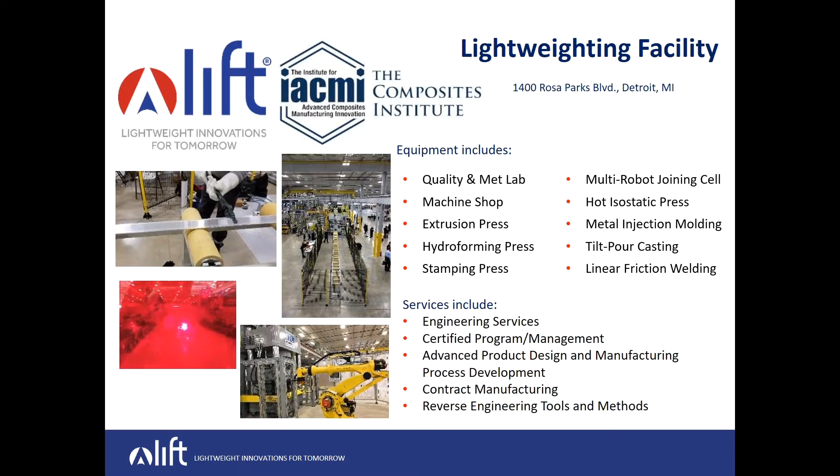As I mentioned, the Lift Off webinar series is brought to you by LIFT and the Center. So I want to give the Center a chance to talk about their services and the support they provide manufacturers across the state of Michigan. So I believe we have Elliot Forsyth on from the Center to do just that. So Elliot, I will hand it off to you.

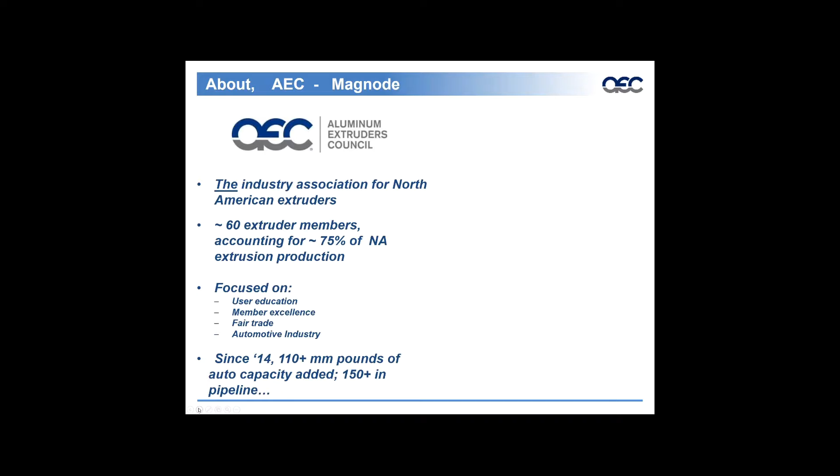The AEC is the Aluminum Extruders Council, the industry association for North American extruders. We represent approximately 60 extruder members, accounting for approximately 75% of all North American extrusion production. And our teams are focused on user education, member excellence, fair trade, and, as we are here today, the automotive industry. Since 2014, approximately 110 million pounds of auto capacity has been added, and approximately 150 plus in the pipeline to support the automotive industry.

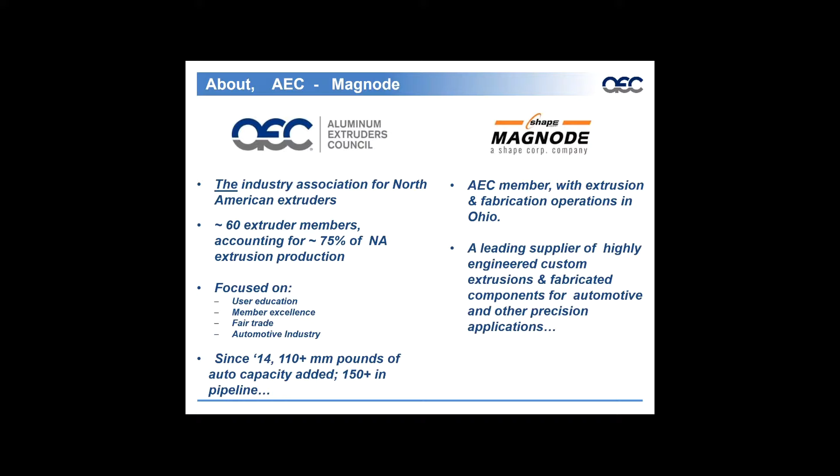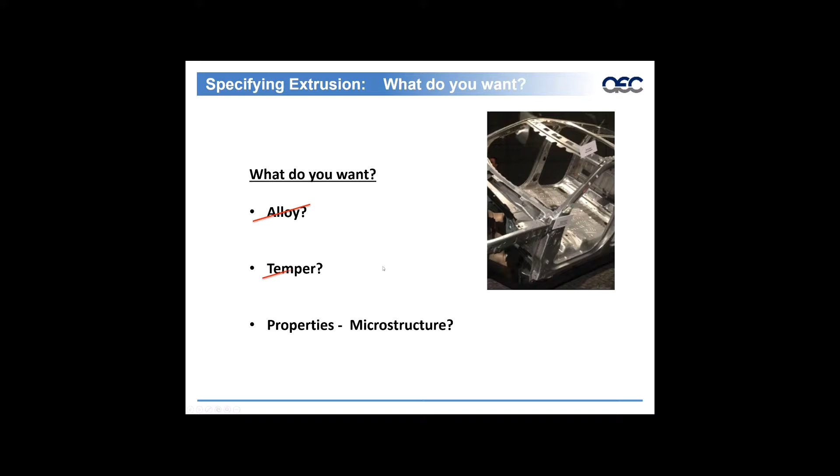So when we talk about specifying extrusion, we ask the first question, what do you want? And we see this as we receive inquiries relative to extrusions and different applications. And we always ask the question, what is it that you're looking for? Is it an alloy? Most likely not. Is it a temper? Most likely not.

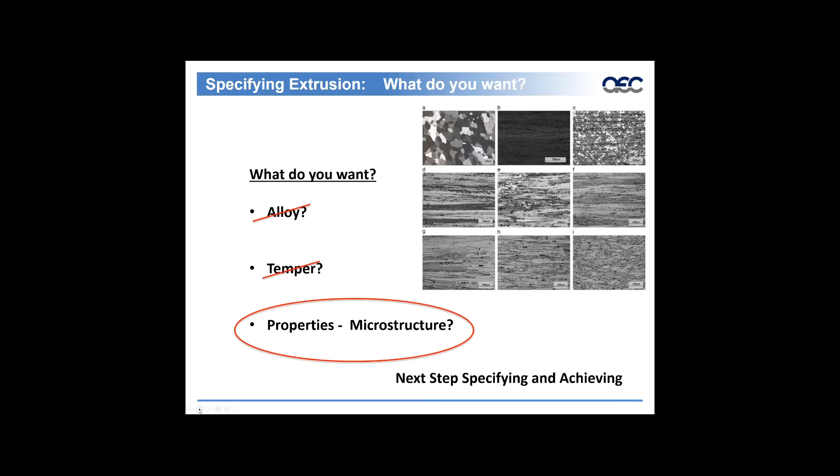The interest is in the properties and the microstructures required in order to meet the specifications and the performance needs of the application. So we're going to focus in on properties and microstructure, which as a result of these needs lead us to the alloy and temper. So the next step is specifying and achieving.

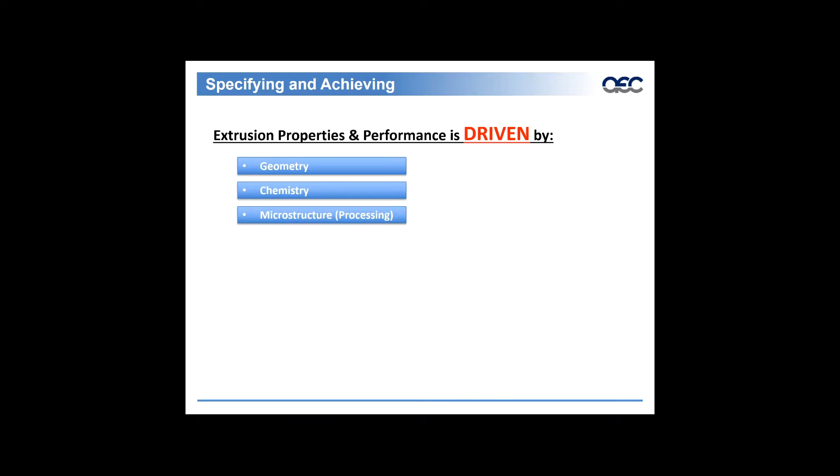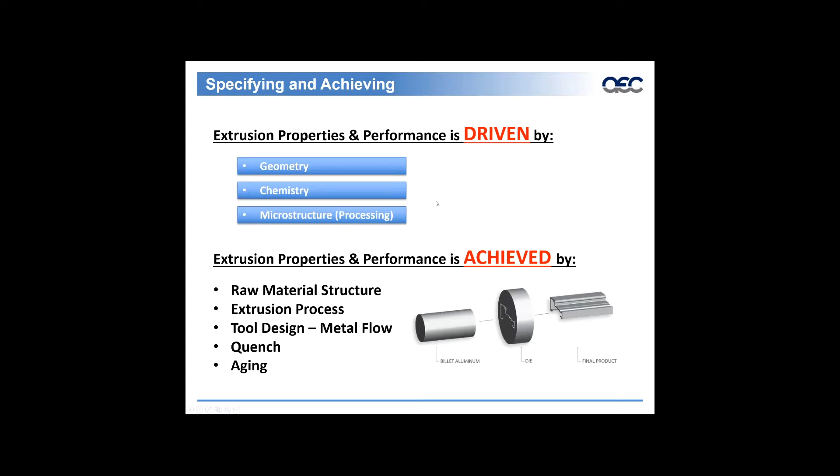Extrusion properties and performance is driven by geometry, chemistry, and microstructure processing. Extrusion properties and performance is achieved by raw material structure, or raw material in the form of a billet, the extrusion process and tool design / metal flow, which occurs within the die and extrusion press, and the quench and aging process associated with the final product. In today's webinar, we'll go through each of these items to bring some clarity around the achievement of microstructure.

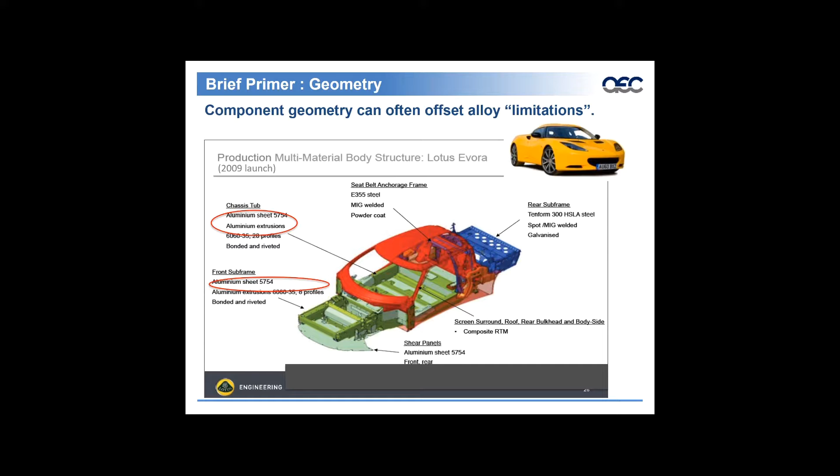And here, the front subframe, 6060 was also utilized in eight profiles. Again, the advantage is tighter tolerance as a result of the quench associated with a 6060 alloy, higher productivity, which results in a lower cost, and better downstream manufacturability. This was all achieved by the use of geometry. Lotus used profile geometry to offset the lower strength of the preferred 6060 alloy.

So the profiles that are shown here are, in today's industry, probably what I would consider moderate in complexity. Extruders today can produce more complex, greater numbers of hollow profiles, which can allow you to utilize a 6060 or 6063 alloy, where some applications with a simpler geometry may require a higher strength 6082 alloy. So profile geometry should always be taken into consideration in combination with the alloy itself.

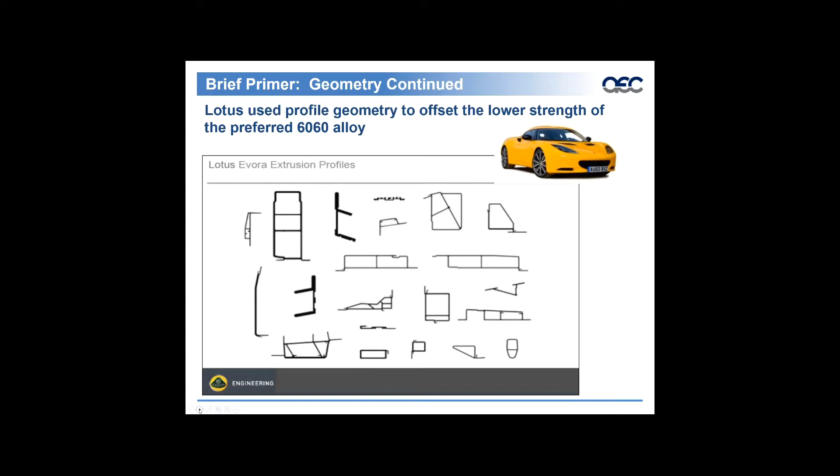So chemistry. Different alloy chemistries yield varying mechanical properties for the resultant extrusion. So this chart basically shows the alloy series as well as the major alloying element for each. So we have the 1000 series, which is minimum 99% aluminum. 2000 series, which is copper, which provides high strength, relatively low corrosion resistance, excellent machinability, and is heat treatable. 3000 series, which is manganese, low to medium strength, good corrosion resistance, poor machinability, but good workability, primarily in impact extrusions, impact applications.

4000 series, which is silicon, not available as extruded products. 5000 series, which is magnesium, low to moderate strength, excellent marine corrosion resistance, and very good weldability. Then 6000 series, the most dominant in the extrusion industry, which is magnesium and silicon. And again, the most popular extrusion alloy class. It provides good strength, good corrosion resistance, good machinability, good weldability, good formability, and is a heat treatable alloy.

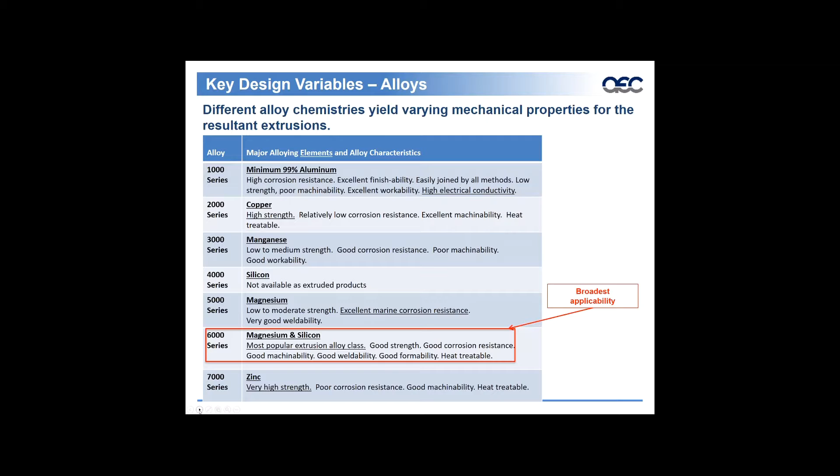7000 series, which is the primary alloying element of zinc, is very high strength, but poor corrosion resistance, good machinability, and again, another heat treatable alloy.

When we look at the different alloys, this is an example of some of the specific alloys within the 6000 series. This is a broad spectrum, the 6060/6063, lower mag silicon alloy, all the way up to a 6082, which is a higher strength, and a 7003 in two different tempers. This represents the temper to that specific alloy, as well as the yield strength, ultimate strength, and percent elongation. These are minimum requirements relative to these alloys.

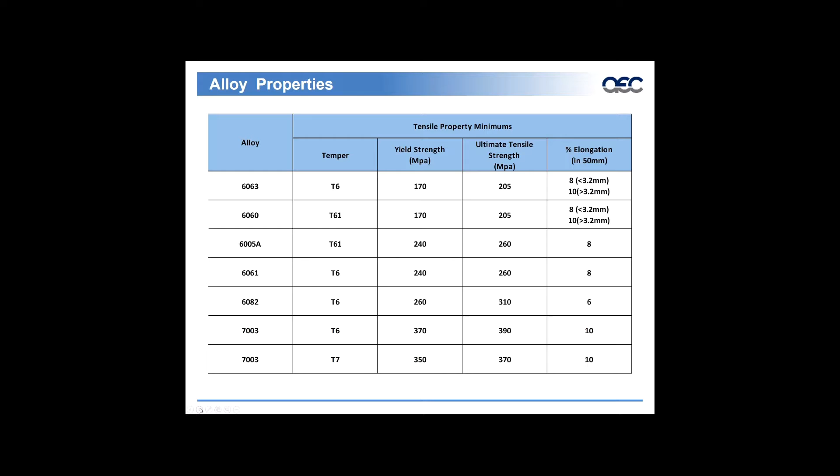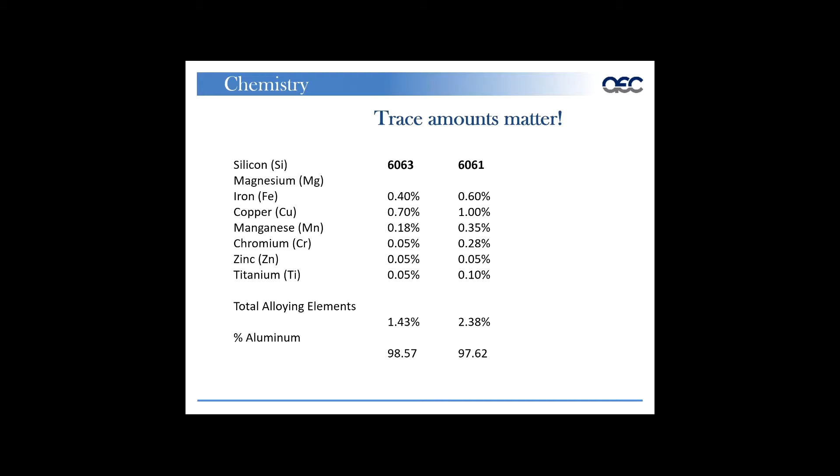Trace amounts matter in regards to chemistry. So here's an example of a 6063 alloy and a 6061 alloy. And we can see the total alloying elements are represented by less than 3% relative to percent aluminum. So as we saw in the prior slide, the difference in mechanical properties between a 6063 and a 6061. But this represents what minimal difference there may be in a specific alloy. So for example, your iron, your copper, your manganese, the magnesium, zinc, titanium. So trace amounts matter.

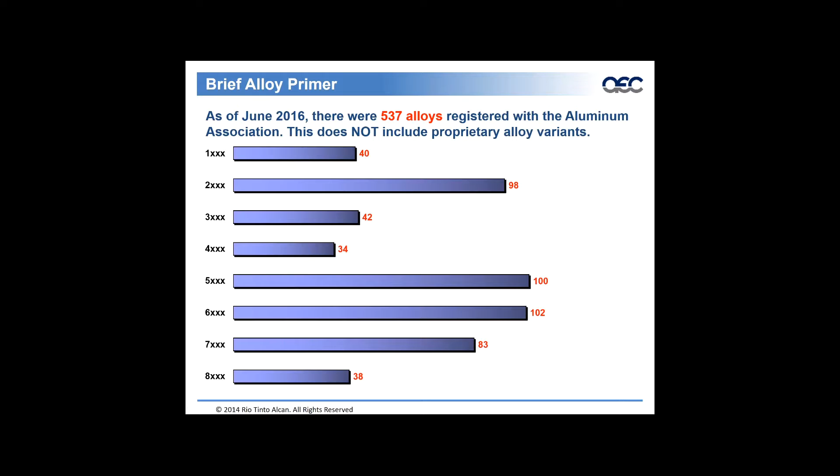As of June 2016, there were 537 alloys registered with the Aluminum Association. And this is a key note: that does not include proprietary alloy variants. And that's considerable. So you can see here in the 6000 series, there were 102 at that time. And the purpose for that is the ability to tweak an alloy and tweak a chemistry specific to the needs that are required for the application, whether that be grain structure, performance, mechanical properties. But as of 2016, 102 within 6000 series, 83 within 7000 series, and 42 within 3000 series. Again, does not include proprietary alloys specific to an application.

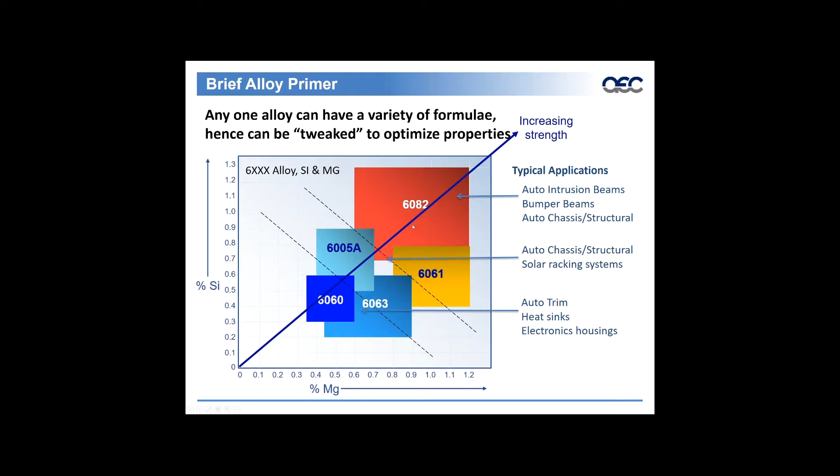Then we get into the 6082, 6061, higher band of 6005A, which is typically utilized for auto intrusion beams, bumper beams, auto chassis, and structural application. Typically full water, highly sensitive alloys to quench rate. So as we go up in silicon and mag, we gain mechanical properties. The process within the extrusion system changes as a result of quench, and we get an increase in strength, but also an increase in cost. So this is a nice breakdown to see how the difference in silicon and mag are represented within a given alloy.

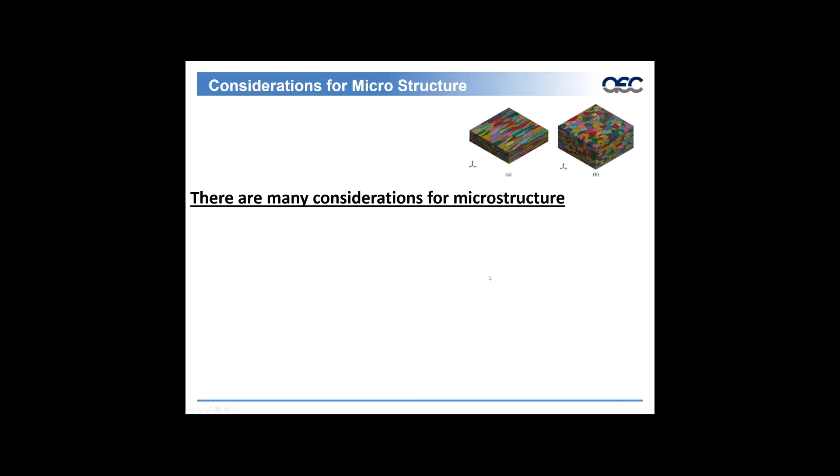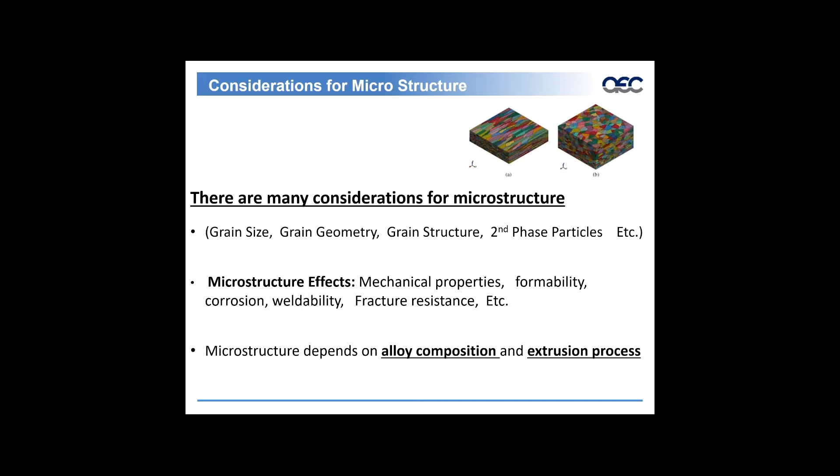So a little bit about chemistry, and now we'll talk a little bit about microstructure and processing. Considerations for microstructure: there are many considerations for microstructure: grain size, grain geometry, grain structure, second phase particles. It's a fairly long list. Microstructure affects our mechanical properties, formability, our corrosion resistance, weldability, and fracture resistance. Microstructure depends on the alloy composition and the extrusion process itself.

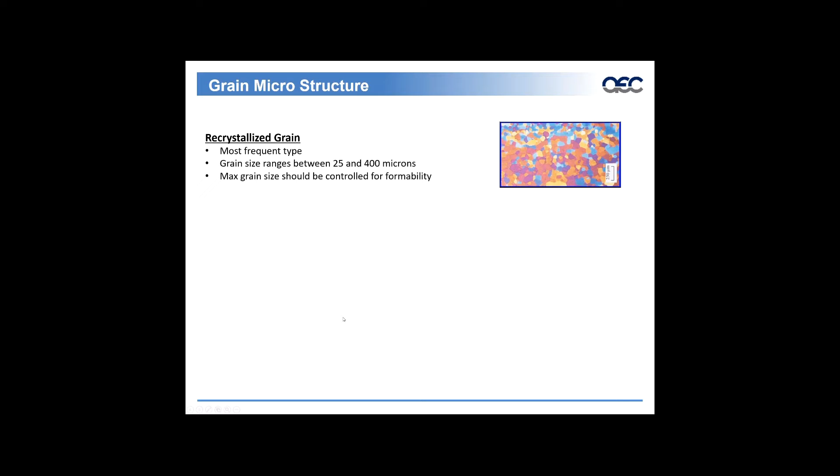A little bit about grain microstructure. We're going to talk basically about three here today. Recrystallized grain, which is the most frequent type. Grain sizes range between 25 and 400 microns. And the key here is the max grain size should be controlled for formability. A fibrous grain, typically higher strength alloys with specific alloying elements, increased mechanical properties, increased fracture resistance. It includes a better resistance to corrosion as a result of the fibrous grain itself, but a reduced ductility.

Then we have a mixed grain structure, which is a fibrous grain typically with a recrystallized layer represented here. Fully fibrous grain may not be achievable. The surface recrystallizes first, and that's represented here in the image.

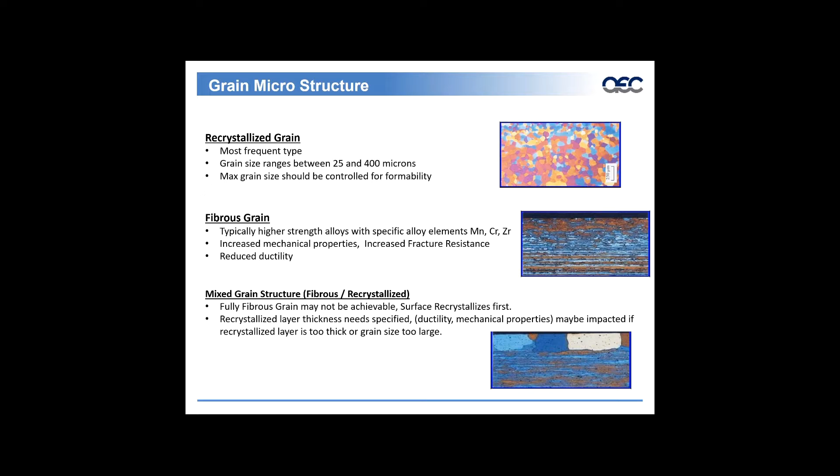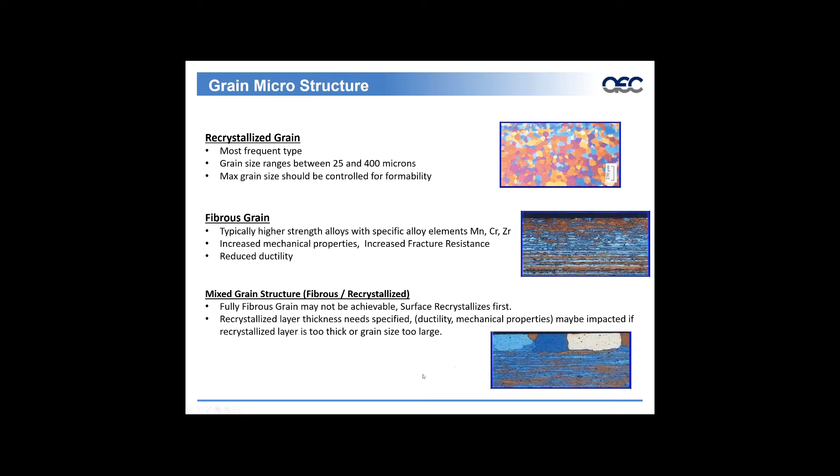Recrystallized layer thickness needs to be specified. Ductility and mechanical properties may be impacted if the recrystallized layer is too thick or the grain size is too large. So we're monitoring the grain size of the recrystallized layer as well as the band thickness of that layer itself. To go further in the webinar, we're going to talk more about the mixed grain structure, the fibrous recrystallized.

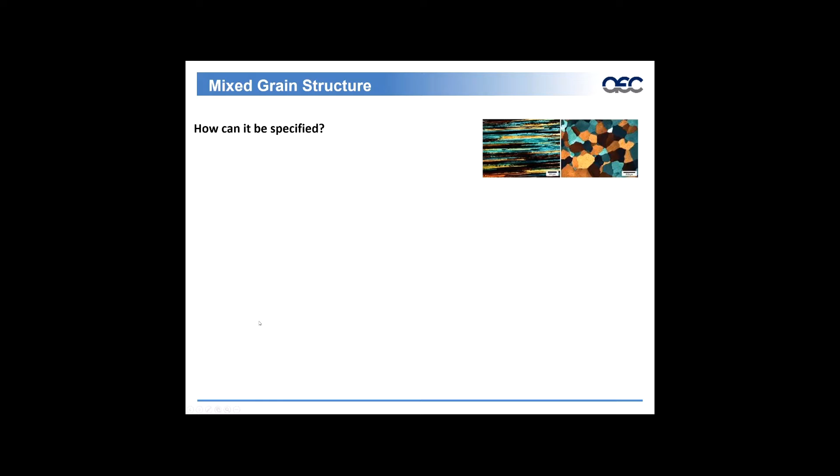So mixed grain structure, how can it be specified? There's many different ways to go about that. My experience has been the total thickness of the outer layer typically has a percent not to exceed. That percent could range by specification or by requirement, but for example, it may range from 10 to 20% or 25%, depending on the application, the performance requirement.

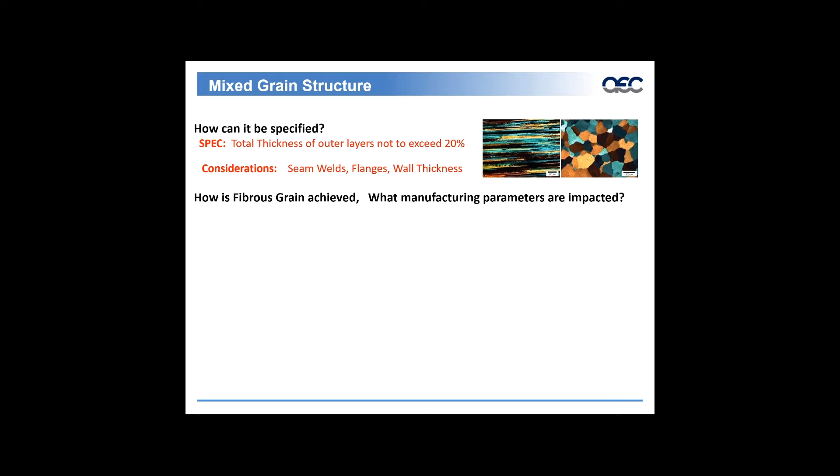But considerations that have to be taken into effect is the seam weld location. So in a porthole extrusion application where seam welds exist, typically these specifications don't apply in those areas. They typically don't apply in flanges, and wall thickness needs to be taken into consideration when those specs are applied.

How is fibrous grain achieved? What manufacturing parameters are impacted? You'll see here primarily a lot of it has to do with time and temperature, but chemistry, as we spoke before, of our raw material, the homogenization process and cycle associated with that raw material that's provided to the extrusion press, the billet temp and length itself, so the temperature of the raw material that is loaded into the extrusion

press is critical, the temperature of the tooling, the container temp in which the billet resides during the extrusion process itself, the speed in which the extrusion occurs, die design and metal flow, the quench rate, profile geometry, and extrusion ratio. So a lot of process parameters are involved in the creation of a fibrous grain.

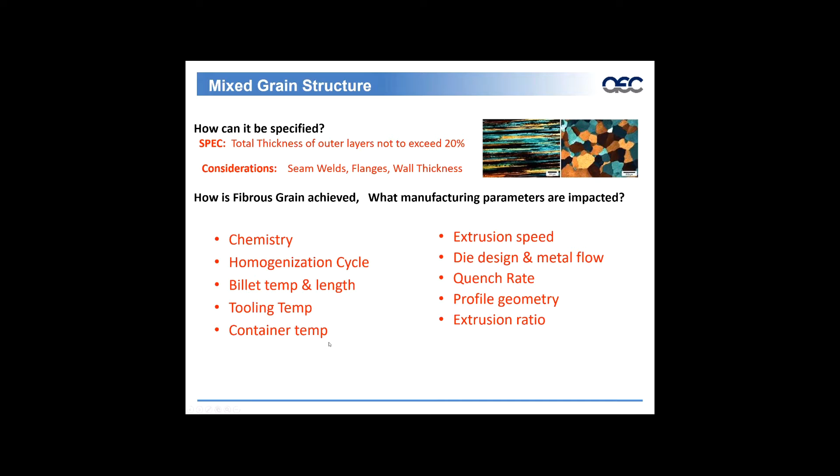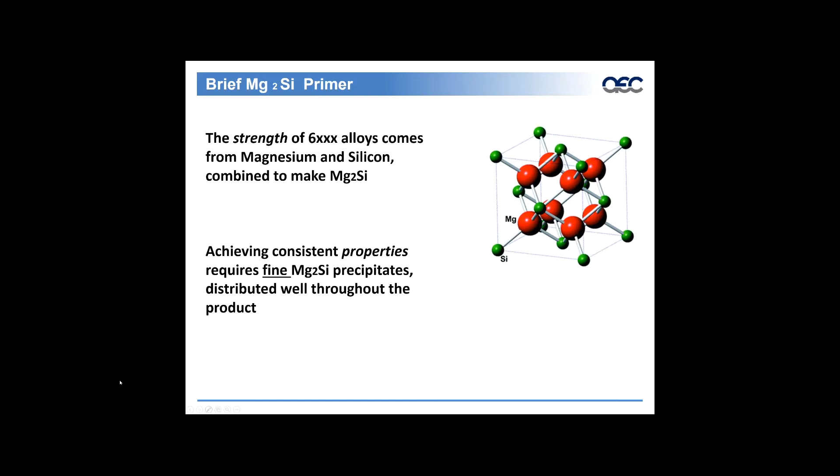So let's look at the process. Just a brief primer. The strength of 6000 series in general comes from magnesium and silicon combined to make Mg2Si. Achieving consistent properties requires very fine Mg2Si precipitates distributed well throughout the product. How do we achieve that? Achieving desired properties is heavily dependent on three processes that exist within the extrusion operation.

And here we represent the general stream of an extrusion process. We have an oven, we have an extrusion press with a quench box right after the press, a cut-down saw, the stretching application, another saw that cuts down to lineals, and our age oven.

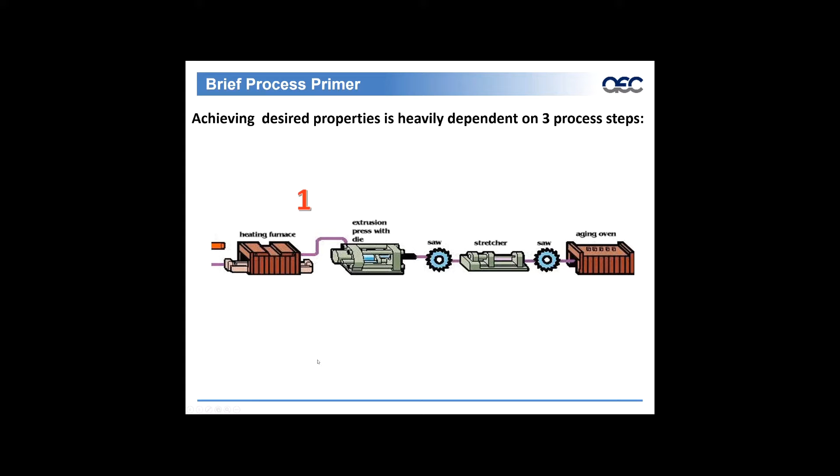So the first stage that's most critical: proper metal temperature through the die is required to put alloying elements into solution. So our raw material that's being supplied to our oven, that's in line with the extrusion press, has already had the homogenization cycle. So at this point, we are trying to achieve our proper billet temperature that is being applied within the extrusion press. So that's a key aspect of it.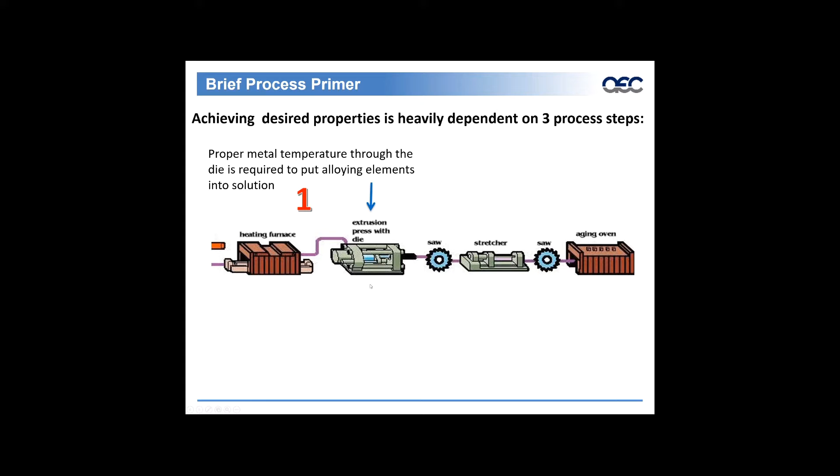Second part is proper cooling and quenching after the press. This is required to trap the Mg and Si in solution while avoiding distortion. So the objective of this, and this is a key factor in the extrusion process and what drives a lot of cost, what drives a lot of tolerances associated with product, and has a big impact in the specific alloys that are achieved relative to the performance need.

But the objective here is to quench fast enough to avoid undesirable concentration of alloying elements and achieve desired hardness, yet slow enough to minimize residual stresses and distortion. Okay, so right after the extrusion press, we took a billet, we brought it to the appropriate temperature, we took into consideration the die design and the metal flow that goes through the press, we extruded at the proper rate. Now we must quench that product.

And the graph that we showed earlier that was relative to the Mg and Si represented really three different alloys. 6060, 6063, this process here can be achieved by an air quench. So the distortion of the product is much less. As a result of the reduced amount of distortion, recovery rates are higher, downstream tolerances associated with profile cross-section, twist and bow are improved. As a result of the lower Mg and Si, the production rates are also higher as a result of the improved metal flow through the extrusion.

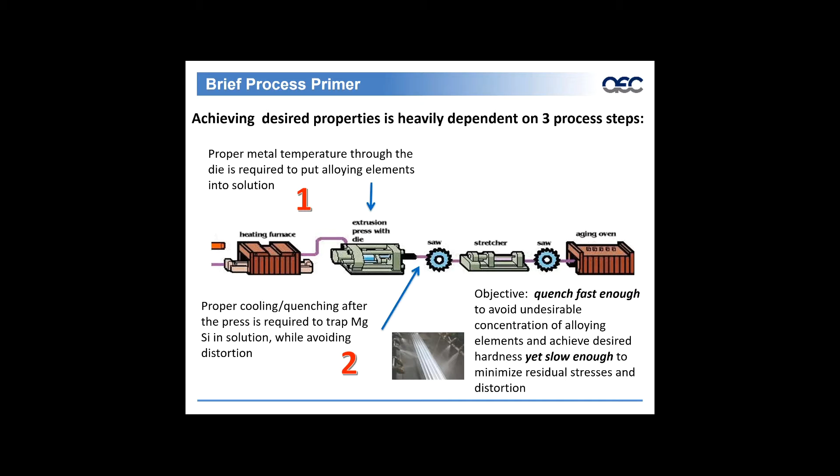Also, as we mentioned with the 6082, it's a higher mag silicon alloy, so the production rate is reduced as a result of the material flow through the extrusion die. But the quench process here is critical for the microstructure, it's also critical for tolerance, and it's also critical for performance, productivity.

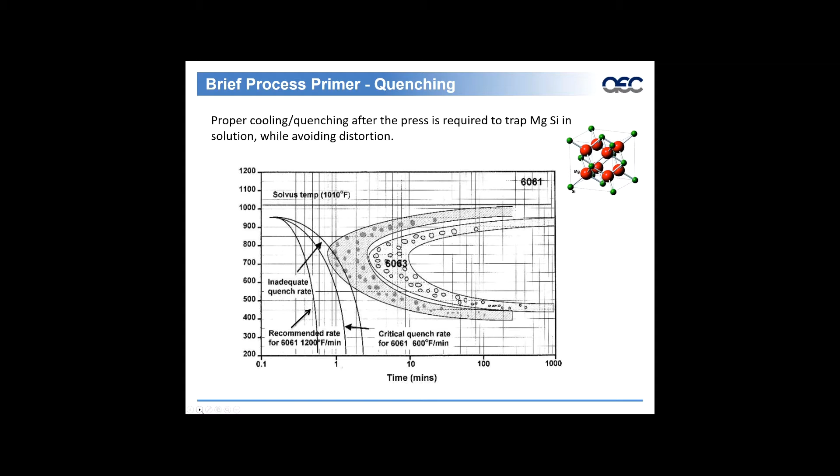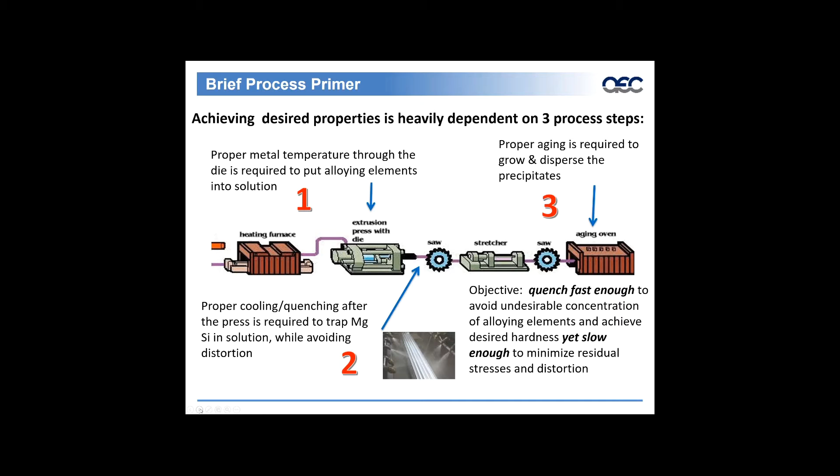The third critical part of the process is proper aging required to grow and disperse the precipitates. And those age ovens, while in the same location as the extrusion operation, are offline from that operation. So temper, artificially aging extrusions at raised temperature for a period of time, will increase strength for various alloys. A lot of the tweaking can occur during the age practice, and age practices can range from 5 hours to, let's just say for discussion purposes, 12 hours for a 6000 series alloy.

Typical extrusion tempers are F, extruded and air cooled; O, fully annealed; H112, strain hardened, used for non-heat treatable alloys. T1 is cooled from an elevated temperature and naturally aged. T4 is solution heat treated and naturally aged. So we get a T4 condition once we exit the extrusion press and maintain our quench rate, whether it be air, water, mist, or water.

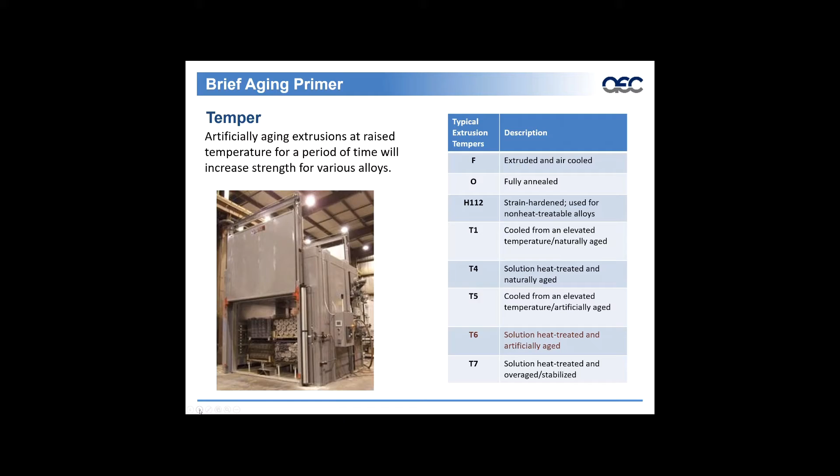T5 is cooled from an elevated temperature and artificially aged. T6 is a solution heat treated and artificially aged temper. And T7, also solution heat treated and over aged, application of a temper for stability reasons. So aging and temper is critical and can add additional performance properties to your extrusion.

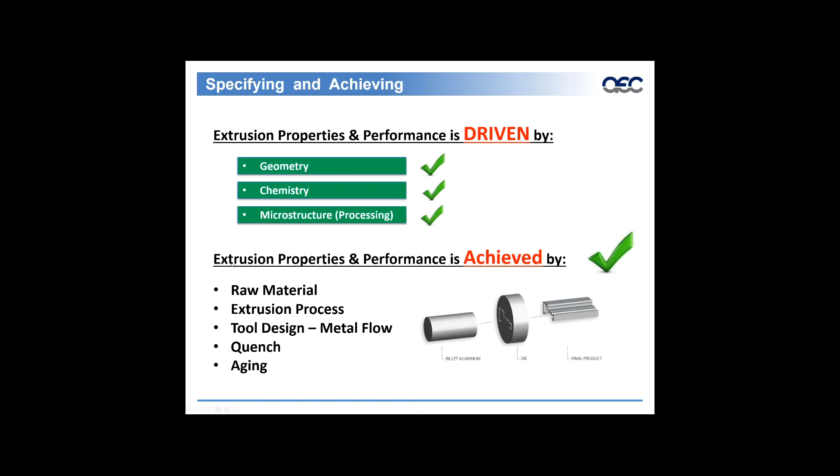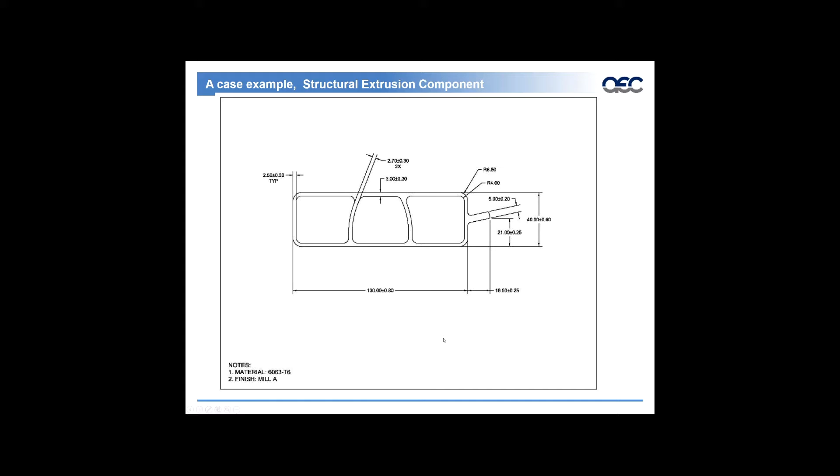Okay, so we talked a little bit about geometry, a little bit about chemistry and microstructure, extrusion properties and performance, and how they were achieved. Now here's a case example of an extrusion. Typically, a print could come in like this, looks relatively simple, not a lot of tolerance applied to it, very simple alloy applied, typical 6063. However, the application may be structural. Could be a bumper, it could be a structural member.

Post-weld locations. Is there post-welding associated with this product? If so, we may not want a weld location where the post-weld actually starts and finishes. What is the post-manufacturing? What needs to be taken into consideration? How much machining will occur? There can be adjustments made in the mechanical properties and the microstructure for machining. Is grain size a concern? Recrystallization layer, as we talked about before.

When we start specifying these items, and is there an IGC specification requirement, it starts to determine the alloy and it starts to determine the quench rate. And once that's understood, then we need to start to understand what are the tolerance requirements. And based on that alloy and based on that quench rate, do we need to apply tighter controls relative to the dimensions and also take into consideration twist and bow? As we talked earlier, based on those alloys and based on that mag silicon content, it's going to determine the quench rate required, which will ultimately give a better understanding of what the twist and bow is.

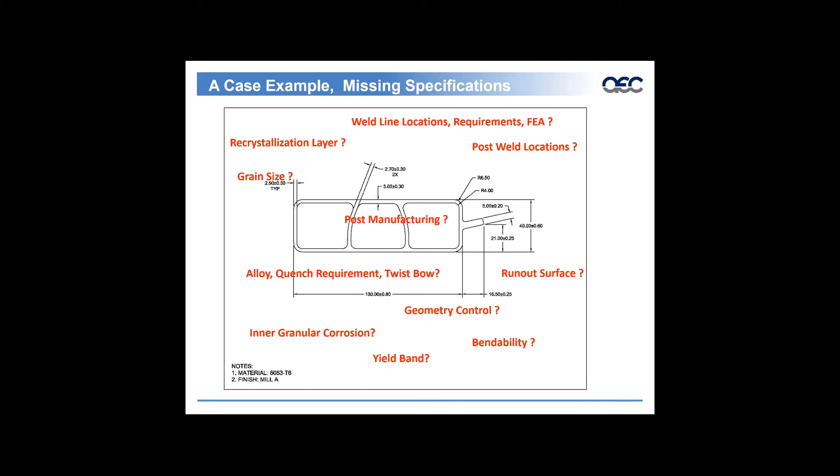So here's some adjustments based on what we talked about. We went to a 6061 alloy versus a 6063. We put some controls relative to straightness and twist because now it's going to go through a water wall, so that needs to be taken into consideration.

Tolerances, unless specified otherwise, were changed to a precision AA. We noted our runout surfaces so that we understand if there are any graphite marks from the runout, they're on a non-welded surface. We specify our mechanical properties with a specific yield strength. So we applied a band, specified the requirements relative to the balance of the mechanical properties, and put a specification on a recrystallized layer. We also noted in this application that no die welds could be applied in this area as a result of the performance need of the extrusion.

Again, a 6061 alloy with these mechanical properties requires a full water wall quench. So we also apply a flatness spec across the bottom for any distortion, a parallelism represented here, and a perpendicularity to hold the squareness of this extrusion as it goes through the quench process, the full water wall quench.

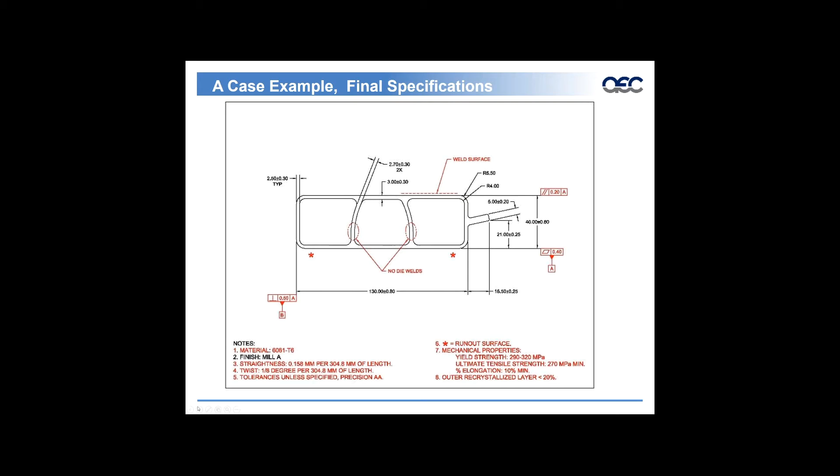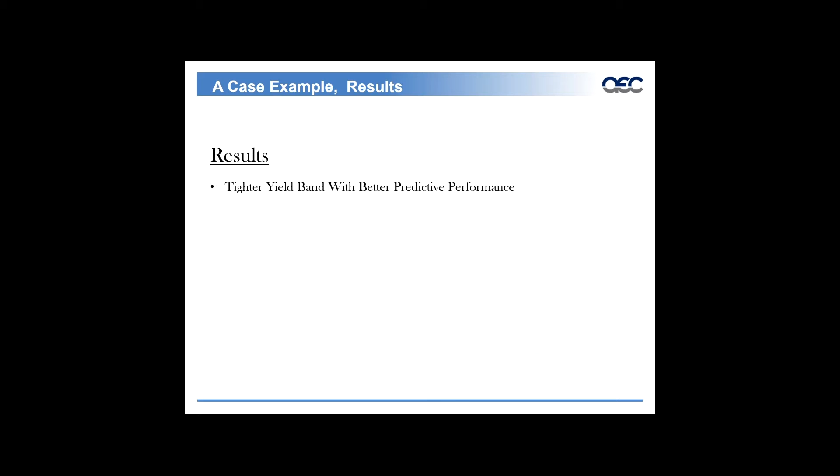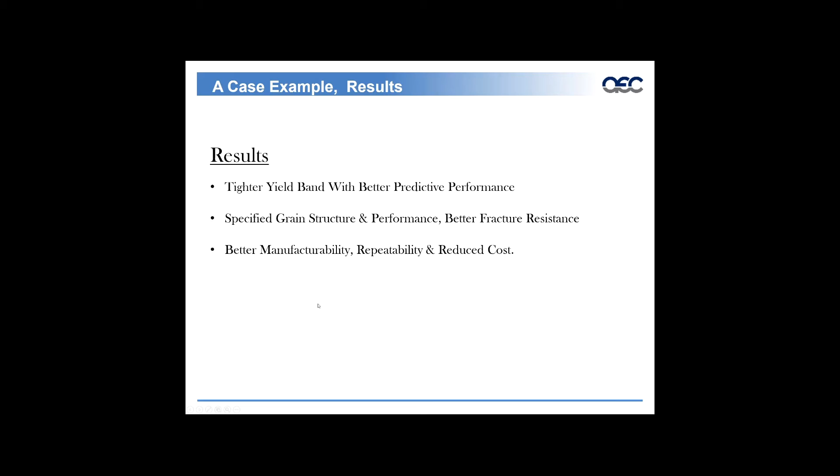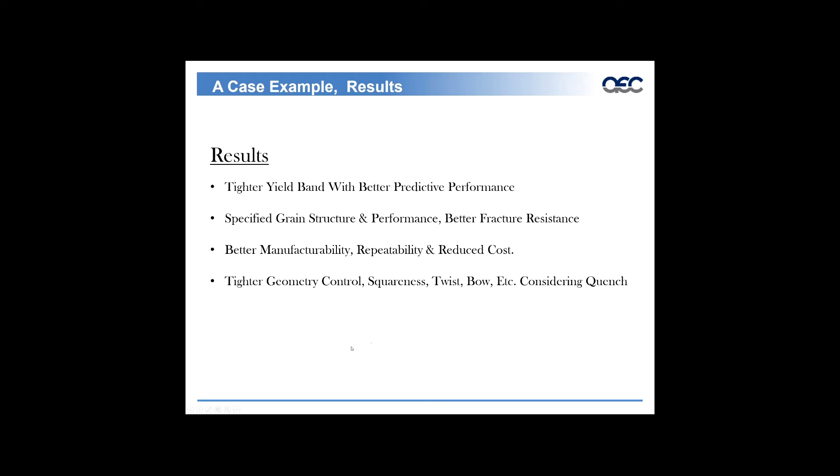So the results of those modifications: a tighter yield band was able to provide a better predictive performance. Specified grain structure and performance yielded better fracture resistance, better manufacturability, repeatability, and reduced cost. As a result of sectional controls and understanding of the twist and bow, tighter geometry control, squareness, twist, bow, etc., considering the quench that was utilized for this specific alloy. The understanding of post-weld locations and surface conditions and seam weld were taken into account for downstream operations. And engineered weld locations relative to high stress conditions were taken into account.

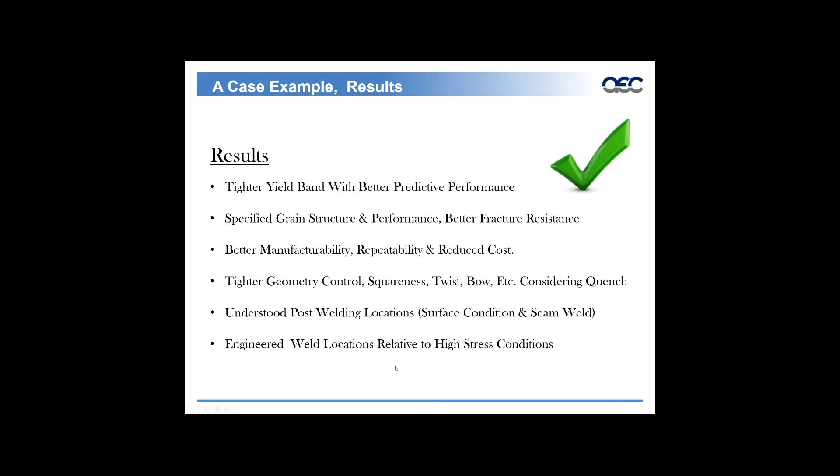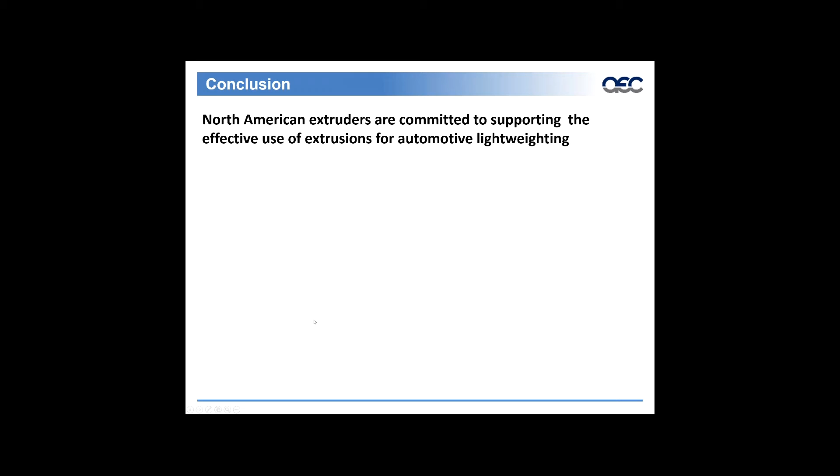So in conclusion, North American extruders are committed to supporting the effective use of extrusions for automotive lightweighting. An active automotive team within the AEC exists, extruders with extensive programs, TS certifications, and robust engineering resources supported by metal suppliers are here to support the automotive industry and the lightweighting challenges that are being presented. Substantial capacity commitments are being made by extruders. Capacity is growing, and the capacity of extruders with the capabilities of supplying automotive product is increasing as well. And knowledgeable technical resources are here to help you achieve the desired performance.